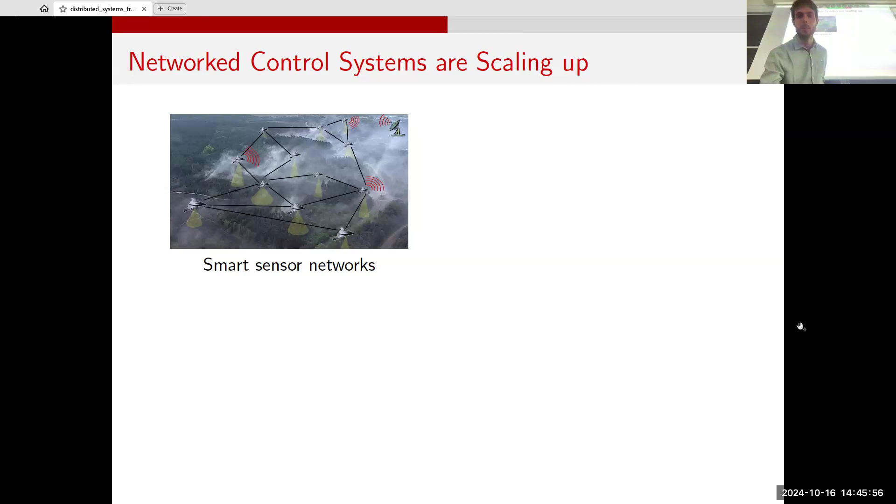Okay, perfect. So just to give you some motivation, here I'll be mostly motivating from networked control systems and large-scale systems where you have a lot of interconnected devices that communicate over some wireless medium usually. So that will be essentially the main motivation for communication delays, as I'll make clear in a few slides. So these are just a few applications on large-scale, especially distributed systems where you might want to implement some distributed control strategies so that the devices communicate and together achieve some control goal in a coordinated or collaborative way.

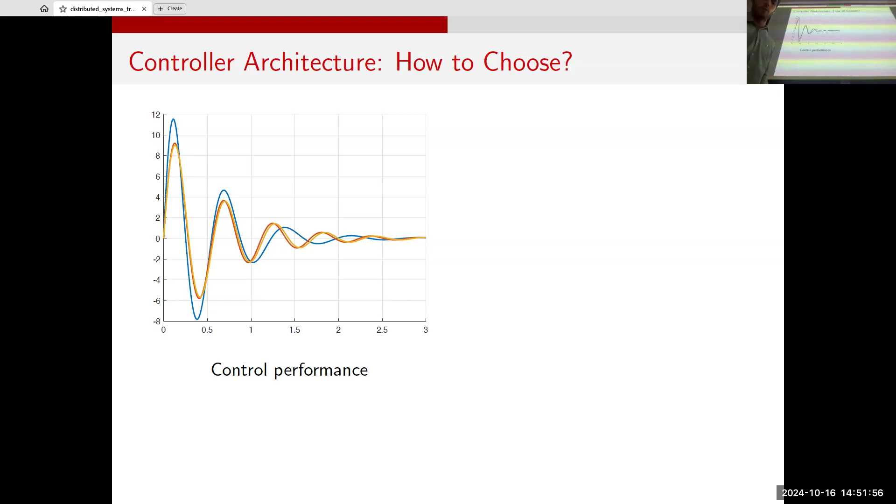So this first part connects to what I mentioned at the beginning. Usually when you want to choose a controller, and specifically a controller architecture, one typically tries to trade off between performance and the complexity that affects how feasible, how costly the implementation is. And this, at least it's assumed, directly relates to the number of interconnections. So a very dense communication topology is usually regarded as difficult to implement, to maintain, to scale; it has some scalability issues in practice. So one typically tries to find a balance, where the centralized controller, an all-to-all communication network, gives you high performance, and sparse distributed controllers are better in terms of practical implementation costs.

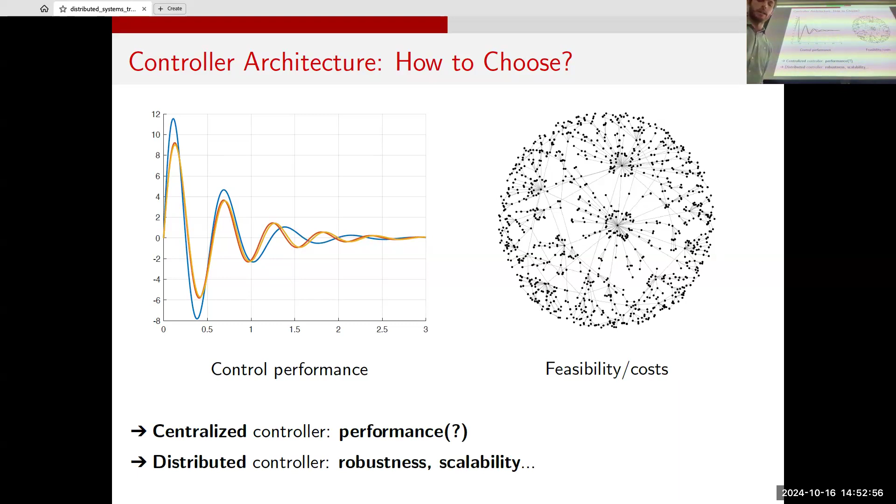However, is this always the case? As I argued at the beginning, sometimes this is very heuristic, and we wanted to challenge this assumption. So we formulated the problem of finding the optimal controller for a multi-agent network system, and we posed the assumption that the communication delays, the amount of time information takes to travel from any node in the network to any other node through a direct link, increase with the number of communication links.

And this actually relates to some practical implementations. For example, when you have shared bandwidth, if you have a lot of links, each link gets a smaller piece of the cake, so that might increase the delays. Of course, these are simplifying assumptions, but it's not that far from reality. And even with time-slotted protocols, if you have two neighbors, you only need 2 communication rounds to get all the information. If you have 50 neighbors, you'll need a lot of time to exchange information with each of them.

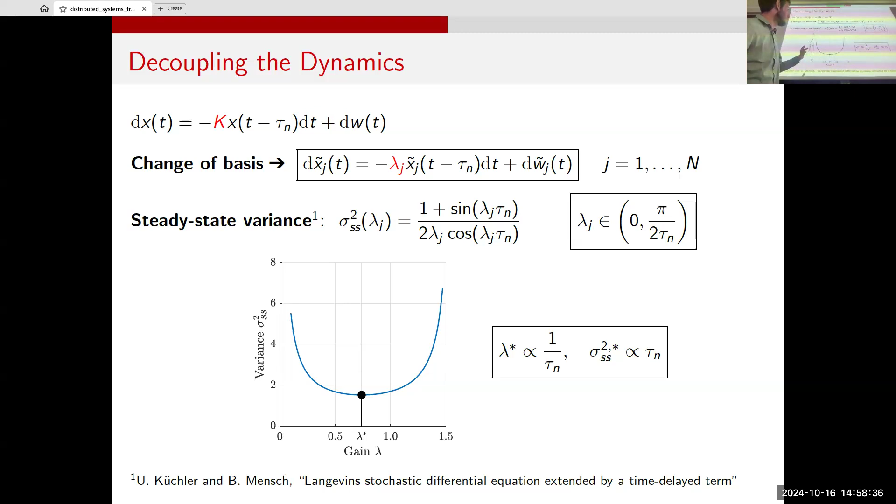This is actually not that important, but this is just to show you that there's a way under continuous time single integrator dynamics to exactly compute this cost. This is quite classic, very interesting mathematical literature. Maybe you know it better than I do. But you have these kinds of curves, which are actually strictly convex. So it means that for this simple case, we can compute, at least numerically, the optimal controller, because it just amounts to solving a convex problem.

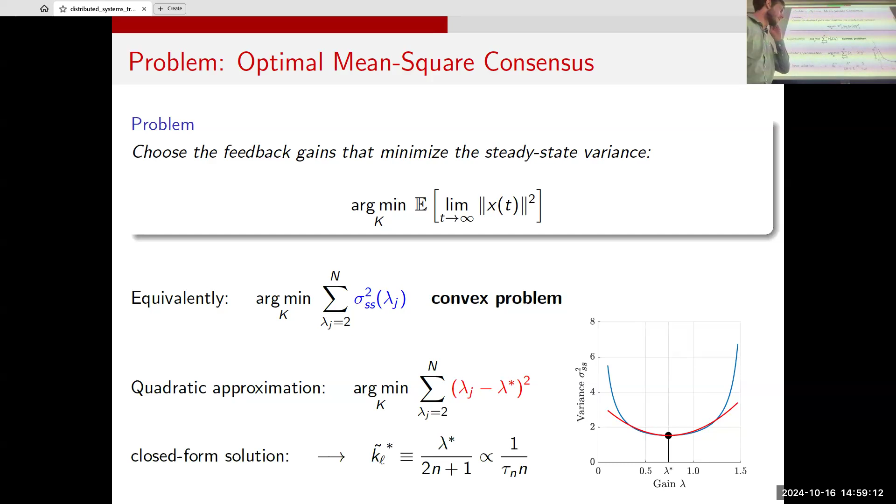And so that is the problem we want to solve. You can rephrase it this way, where these sigmas are computed in closed form. So the problem is nice, it's convex in this case, and it's quite easy to solve. And we also, just for comparison, studied this approximation, which even for more challenging dynamics is always convex, and actually you can solve it in closed form. It's very easy. And so these are the numerical results.

The same thing actually can be numerically seen also for other dynamics, so double integrators, discrete time dynamics, and you have the same behavior. And also for general undirected networks. One nice thing is that for any undirected network, if the matrix K is symmetric, then the problem is still convex, at least for the continuous time dynamics and the single integrator dynamics. So we can say that numerically, this is actually the correct solution to the problem.

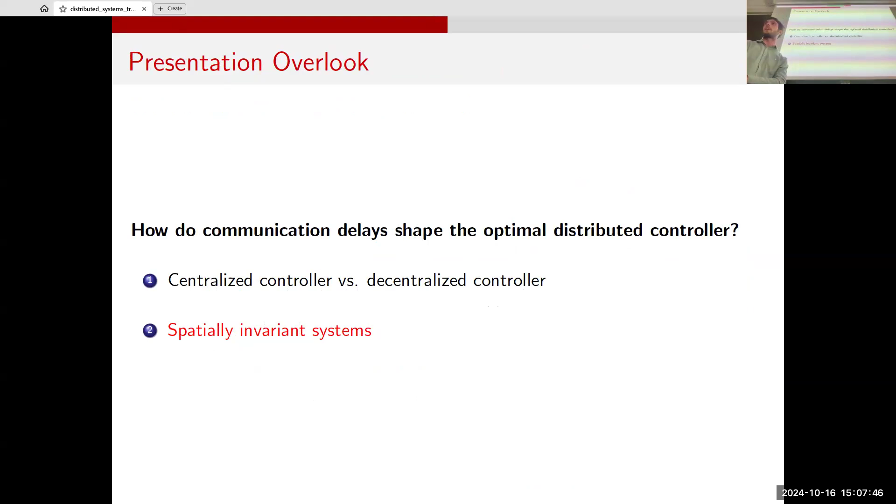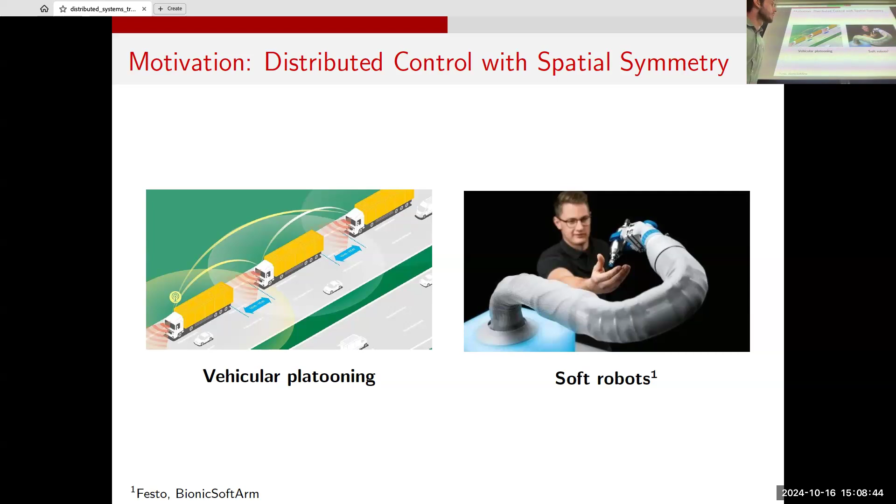Okay, so I'll now switch to spatially invariant systems. In the context of multi-agent systems, spatially invariant systems are, of course, an abstraction, but to connect a bit more concretely with what I'll be talking about in just a few minutes, let me bring up these two other examples of multi-agent systems. You might notice that in both cases, the system essentially lives on a kind of string, a 1D domain, in a very abstract way, of course, but in both platoons and soft robots of this kind, you have controllers and actuators. Subsystems are essentially dispatched on a line. And this gives me some good motivation for this setup of spatially invariant systems I'll be considering.

I should mention that actually these systems are quite a broad model. You can use them to model even other, less structured interconnections and multi-agent systems. But for the sake of what I'll be presenting, I'll be mostly sticking to this kind of dynamics on the real line. So spatially invariant systems are this kind of dynamics where you have some symmetry with respect to the spatial dimension.

So the dynamics is invariant with respect to spatial translation. And this is, I would say, equivalent in a sense to time invariance, but projected on some spatial dimension. So you can imagine if you apply the dynamics and then you shift the system, you keep seeing the same effect as if you would first shift the system and then apply one step or one iteration of the dynamics.

So the very general model for these systems is one where your state psi is, generally speaking, a function on the real line, say, and A is an operator that has this property of spatial or translation invariance, from which the name, the concept of spatially invariant systems comes. So let me give you a couple of examples to make this a bit more concrete.

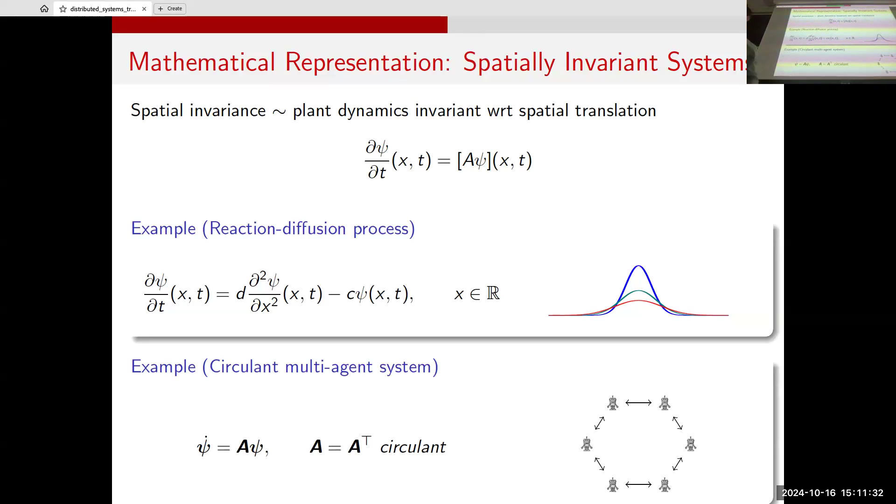Other cases, maybe simpler ones, are circulant multi-agent systems. So again, multi-agent systems with ring topology or circulant topology. So you have the ring topology and then multiple interconnections, connecting to neighbors of neighbors and so on. Just a simple vector dynamics where A is a symmetric circulant matrix. And this is another kind of multi-agent system where in this case psi is not on the real line, we're on the integers, for example, or integers modulo some natural number.

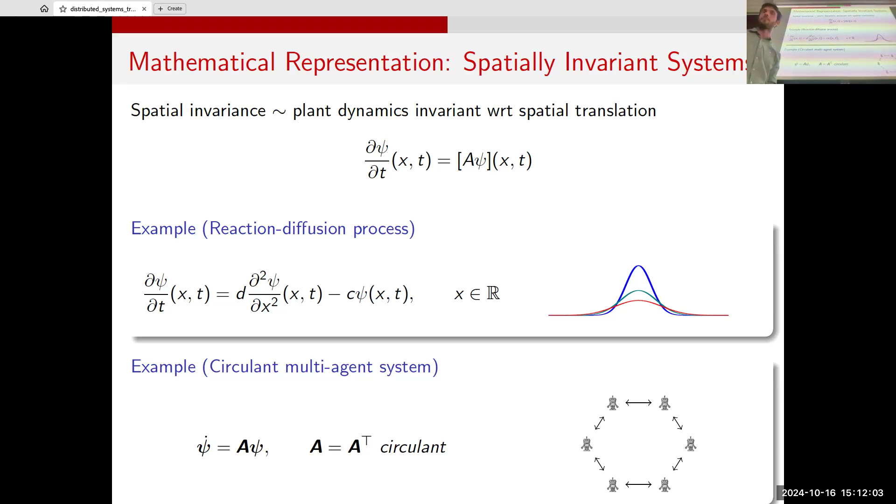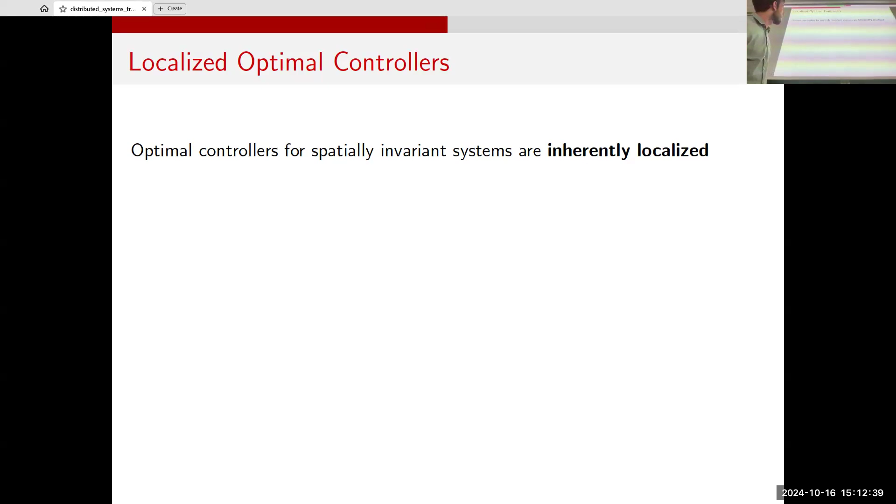So one very interesting thing that motivated the study of these systems since the beginning of the 2000s was that if you want to find the optimal controller for this kind of systems, where optimal controller here is the H2 optimal controller, the standard notion of optimal controller, the optimal controller has this inherent localization property. What does this mean? Let's take this example to make it easier.

The optimal controller is a spatial convolution with the state, where this k-opt is the convolutional kernel. And the convolutional kernel, in this case at least, is something like that. So it decreases very fast with space. Actually, it decreases asymptotically exponentially across space, which is typically referred to as this inherent localization. And you see that this motivates, for example, implementation of distributed controllers with these systems, because what this kernel is essentially saying is that if you go farther away than 4 space units from where you're at, all measurements coming from farther than that are essentially useless because they are amplified by very small numbers by the convolutional kernel.

So this means that, for example, if you have a platoon here and each of these sticks represents a truck that is gathering information from the neighbors, then you might only want to care about the truck that's closest to you, and then the one after, and then you don't need to care anymore about the others.

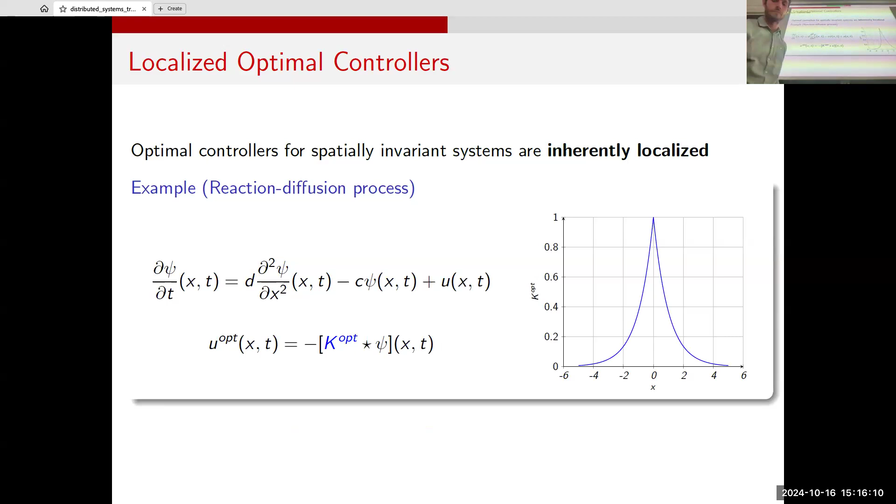Okay, just to give you a glimpse at how we solve this problem. This is a standard way to solve this kind of problem, so I'm not taking that much credit for it, but I'm going to show you because I believe it's interesting. So spatially invariant systems have this very nice property that if you apply the Fourier transform, that calligraphic F, you, so to say, diagonalize the system in the so-called spatial frequency domain.

And again, this is the same thing as when you apply the Fourier transform to a time invariant system. So what you get is a family of decoupled systems where that lambda there represents spatial frequency. So, for example, if the state is a scalar function, here you have an infinite family in general, but still a family of independent scalar systems. So that, of course, makes analysis and design much easier.

And that is the principle that has been used in the past to derive, for example, the property of localization of the optimal controller. For the reaction diffusion process, just to show you an example, this looks like that, where lambda is a real variable. And this means that you can also decouple the optimal control problem. Essentially, you can decouple it into solving a family of independent optimal control problems. So this is what we did.

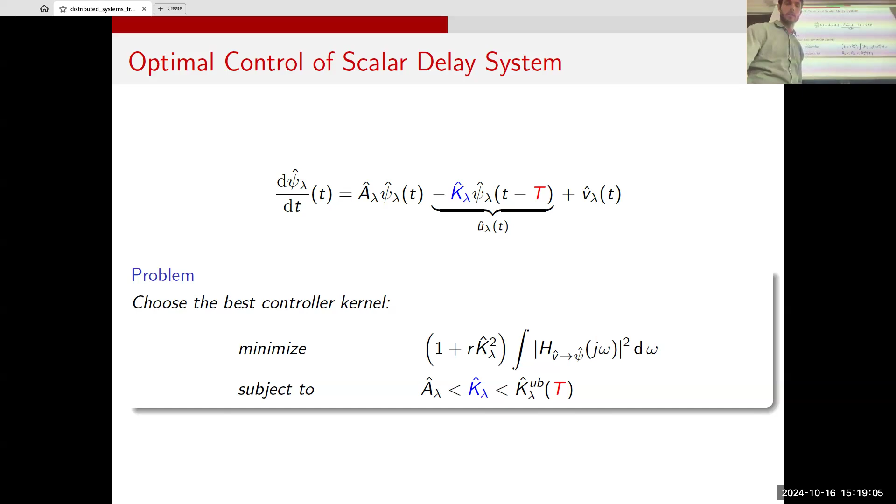So it turns out you can compute this H2 norm by computing that integral in closed form. This is the same paper I quoted before. So that's actually the same result, but with the additional complication that A here is nonzero. In the previous case, it was 0, so this same expression was much simpler. And this looks like this.

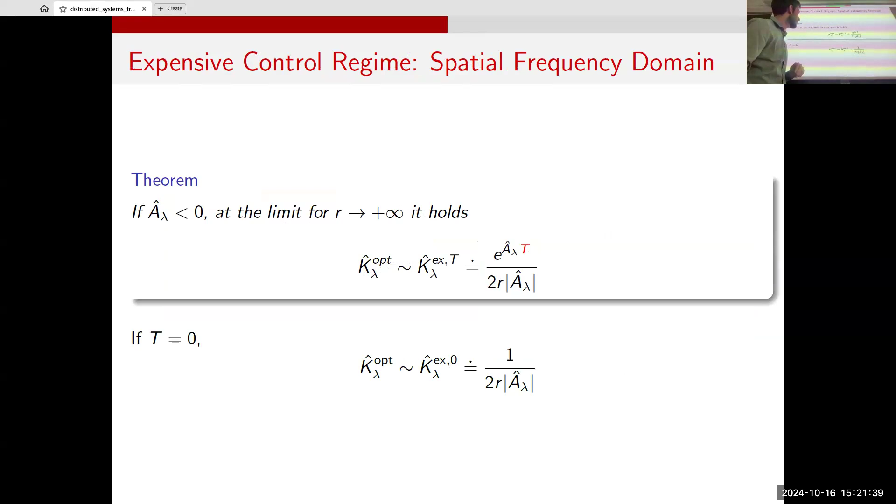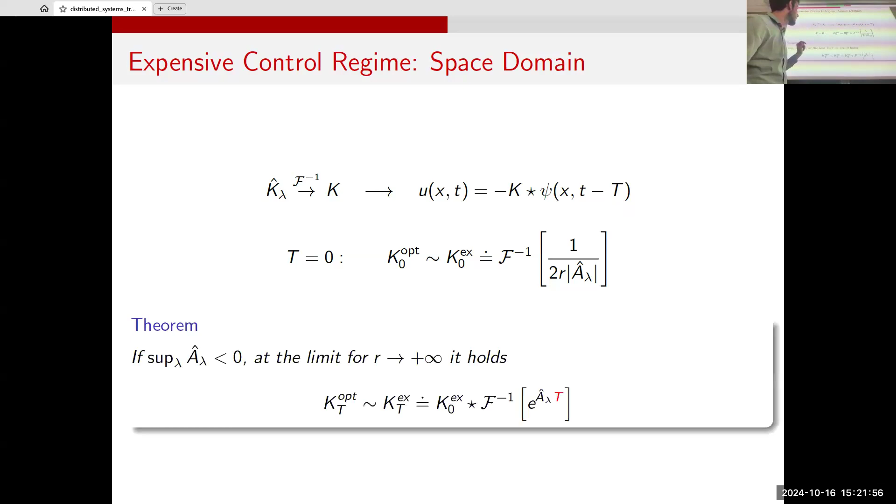And okay, so it turns out that in the limit for the expensive control case, you can compute the optimal controller, let's say the asymptotic optimal controller, in closed form. I don't want to indulge too much on this, but this is to show you that you can retrieve the optimal controller the same way. So the optimal controller is again a spatial convolution with the delayed version of the state, so delayed measurements of the state. And the interesting thing to notice here is that the convolutional kernel is itself a convolution.

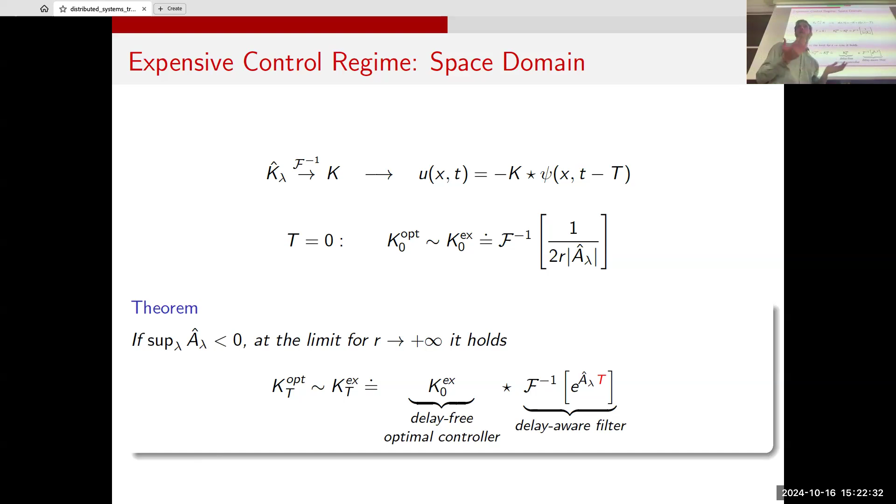So it embeds effects of both the optimal controller in the delay-free case, and also a filter, let's say, that accounts for the fact that you are using delayed information. And this filter actually goes to zero as the delay increases. So this, again, is telling me that if delays are super long, then essentially feedback control is useless because you cannot decrease the cost by any means.

And this is how it looks. So for the reaction diffusion process, the blue pointy curve here is the kernel without delays. And you see that if you have delays, you have a much, let's say, flatter curve. And you can also somehow quantify where the two kernels get more or less the same. They are asymptotically the same, actually. But here you see around the origin there's a huge gap. And that depends on the coefficients of the system, in particular on the delays.

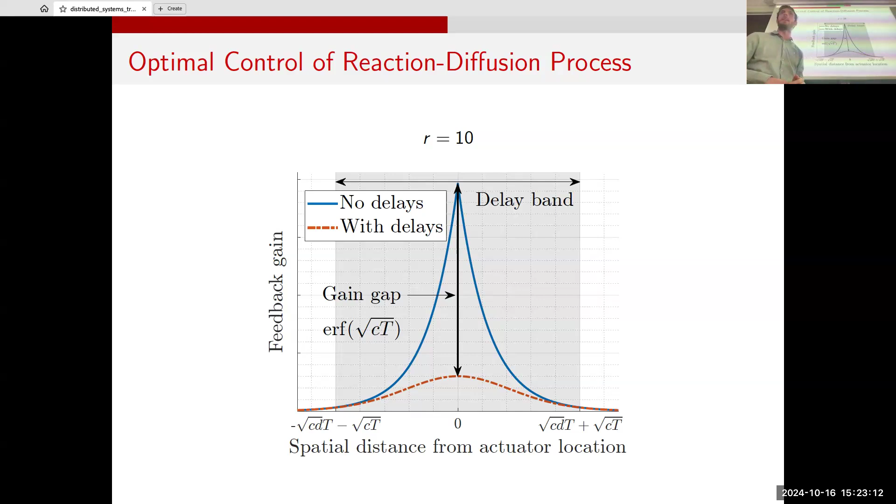So to mention the effects on truncation, and then after this, I'll be done. What does this mean with respect to distributed control implementation? So I mentioned at the beginning of this part that the localized structure of optimal controllers for spatially invariant systems is useful because it can be used to easily implement a distributed controller by simply truncating the convolutional kernel.

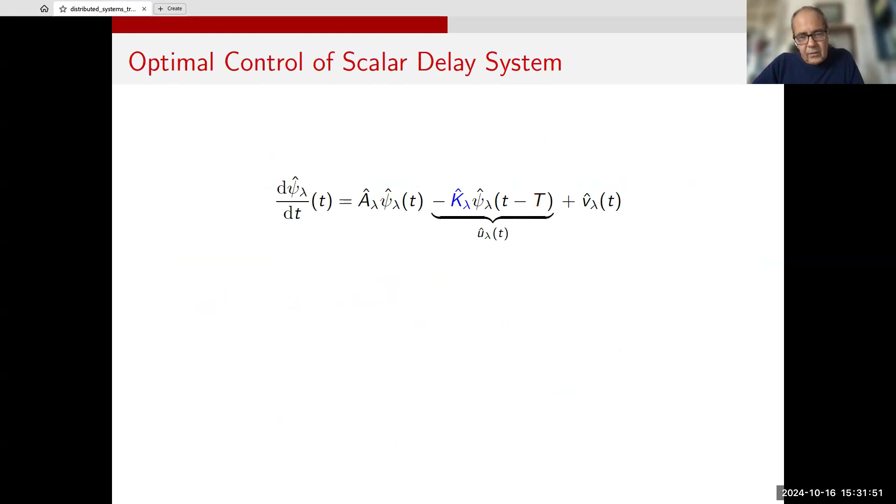Luca. Yep. Sorry, probably I didn't pay enough attention to the initial part of your presentation, but can you say again how the delay in your models depends on the topology? Does it depend on the number of links, or on the degree? I didn't understand if it is constant all over the graph, or if it depends on the node.

Yeah, let me go back to these couple of plots. I think they're a bit easier to understand. You're correct: in the model we use, delays are constant across the graph. So on each link, we assumed the same delay. It's a fixed parameter given a certain topology of the communication graph.